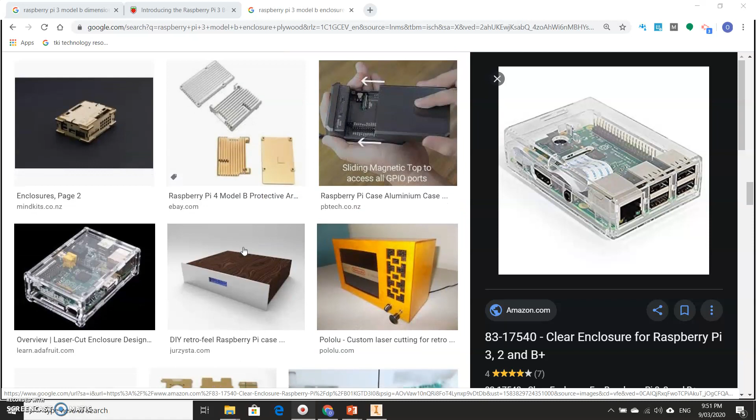Alright, so just a very quick look online to see what other examples there are. There's some clear acrylic used, again on the laser cutter.

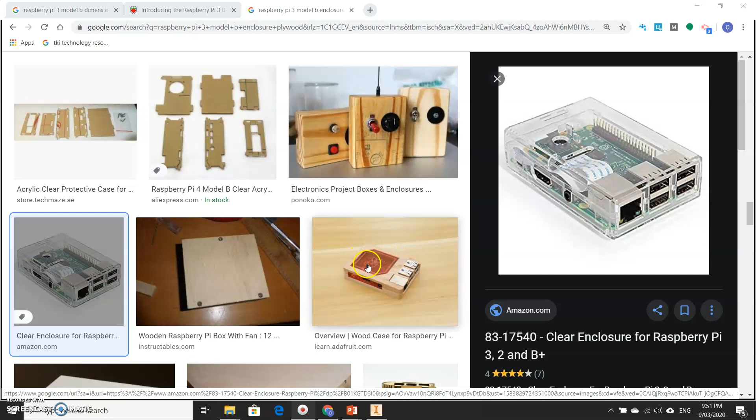But you're not limited to using a laser cutter. I would like you to use some form of CAM, but you can combine some CAM. What's CAM? Computer aided manufacture. So I would like you to incorporate at least a little bit of CAM in there, and that could be - I'm just going to make the enclosure by hand, perfect, but include a little bit of plastic or acrylic just to lift the quality of it. Cool, and it also lifts your skill level too.

Right, let's get into it, alright? Let's get into the actual orthographic projection, the big fancy word, which really doesn't make - it's actually quite easy, alright?

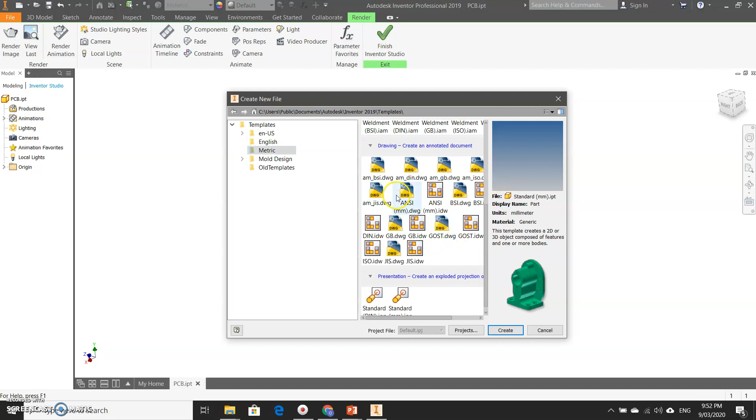So we have saved our drawing, and the first thing we're going to do is go up here and click on New. We'll go to Metric. We'll scroll down - we've done part, we'll do assembly later when we've done our actual enclosure, but we'll go down here to drawing this time. We're looking for a DWG file, and we're looking for millimeters. That's pretty good there, mm.dwg. Click on create.

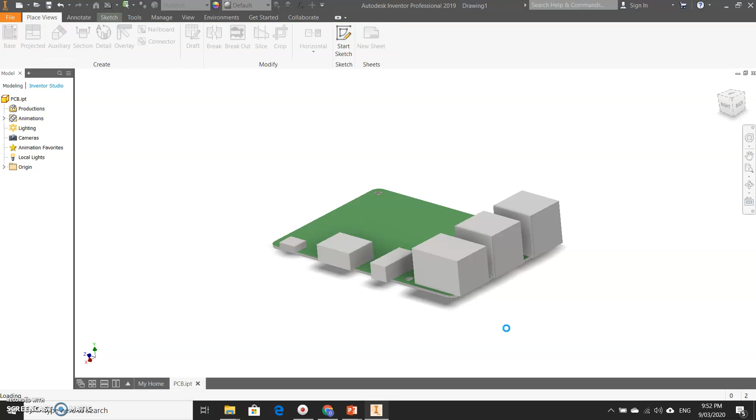Now, again, quite a big software, give it a little second, let it do its magic. Now then, we're into it. So what we can do is we can go and click on base, and it automatically finds the last drawing that you were working on.

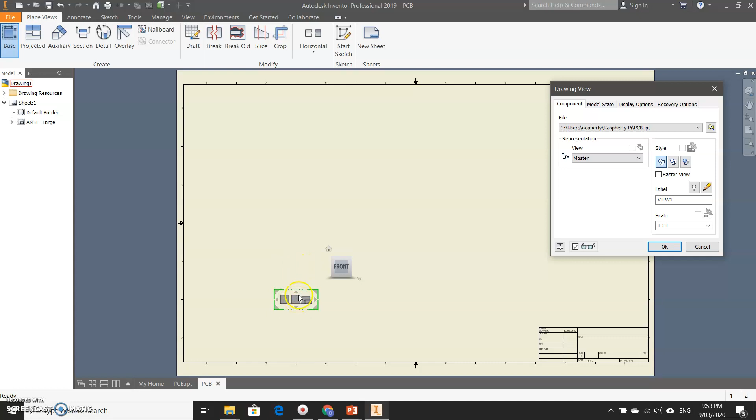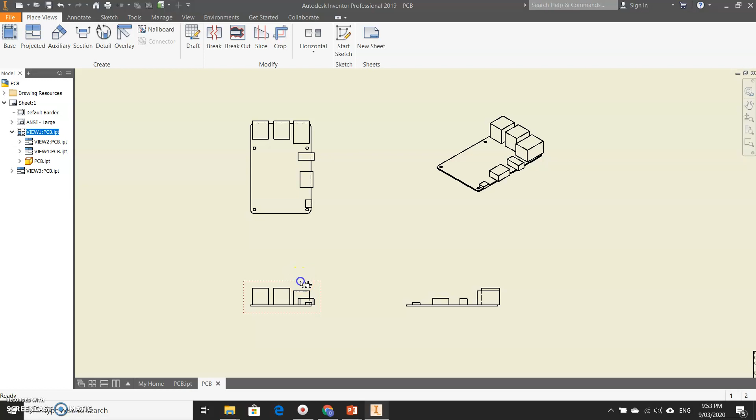How handy is that? Alright, it's automatically throwing up the front elevation down there. It's going to throw us a plan view there. It may even do a 3D over here, and there's another elevation of it there. Now I'm just going to press OK. So what have we got here? That's what the front looks like. This is what the side looks like. That's what it looks like from the top. And that's what it looks like in 3D.

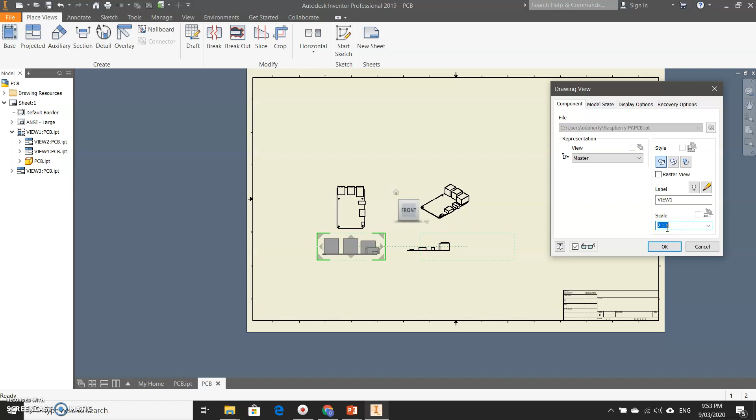Now look at the size of our page and look at the size of our drawing. If I right click here and go to edit view, I can do things like changing the scale to make it either bigger or smaller. So 2:1 means it's going to be twice the size of what it should be. I'm going to press OK and see what that does. I've got drawings, one sitting on top of the other. I can just drag them away. And notice that when I drag it, it only allows me to actually drag it when it's in line with the original.

So I thought I was going to sneeze there.

And this drawing over here, I'm going to make it quite big as well. So edit view, and this time let's make it humongous, 3 times the size of what it should be. In actual fact, that's probably quite a nice size there to actually see what we're doing.

So let's do that for all of our drawings. Sorry, it has to be the original that we change. So we go to edit view, change the scale to be 3 times bigger than what it would be. Click on OK. There we go.

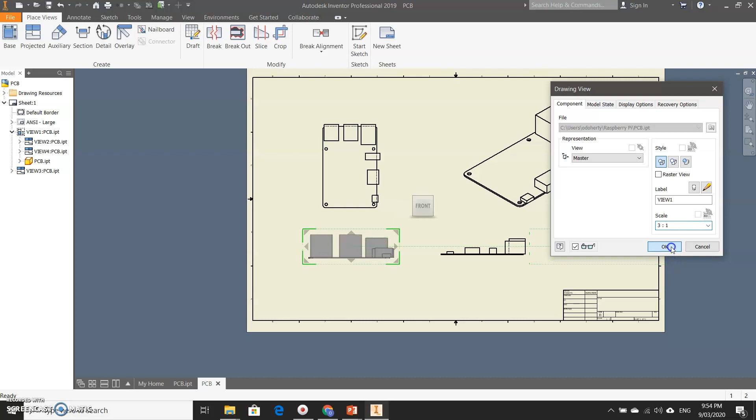Now, right. Now we can get into it. Annotate. Dimension. Alright, I'm going to click on this bottom line here and this top line up here and drag that out to the left and click.

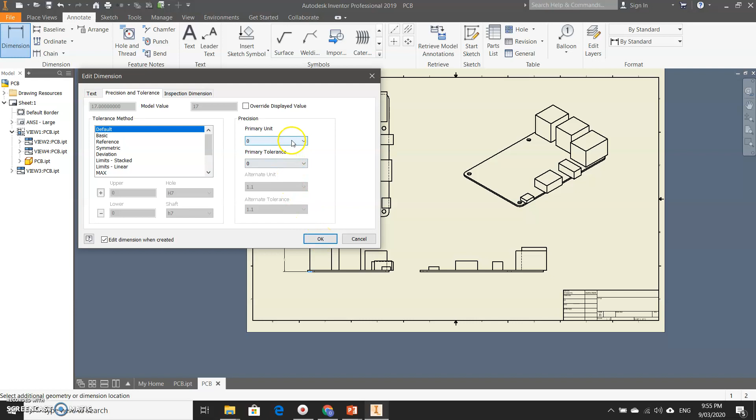Primary unit, I'm just going to put it down to 0, okay? So that should then mean that we don't get really any decimal places, or we can say allow for 1 decimal place. So if we zoom in, that gives us 17.0. Right.

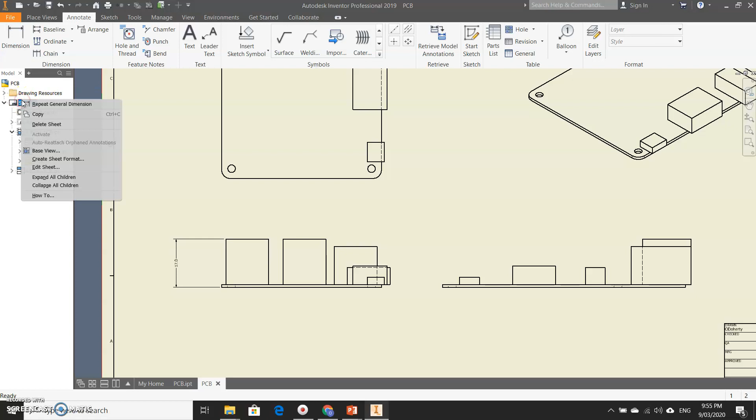So let's get to our next one now. This drawing page looks like it's going to be quite big. So the way we can change that is by going into sheet here. I'm actually in dimension here. So 1 second. Right. Press escape on your keyboard. Click on sheet. Right click on it.

Go to edit sheet, and then we can change the size. So we actually want it to be A3, really, don't we? Click on OK. Now it looks a bit big. So edit view again.

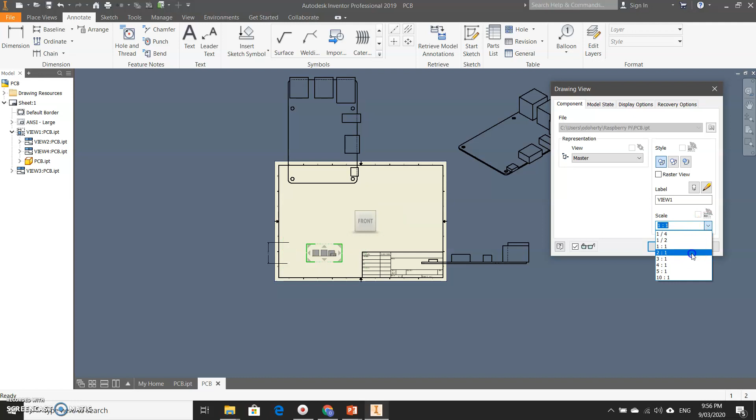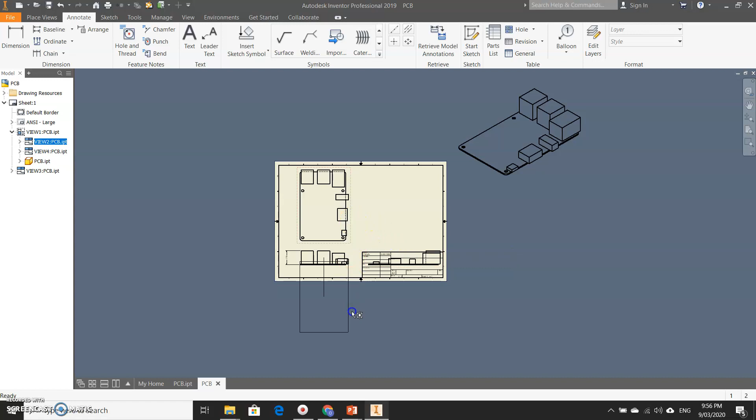Edit view. Let's bring it back down to size 2:1 will be fine. Click on OK. Drag that down onto our page. Now really, does it actually matter, this drawing, on the page where it sits? Not really, because we're only using this as a working document. So I'm going to change the orientation around somewhat,

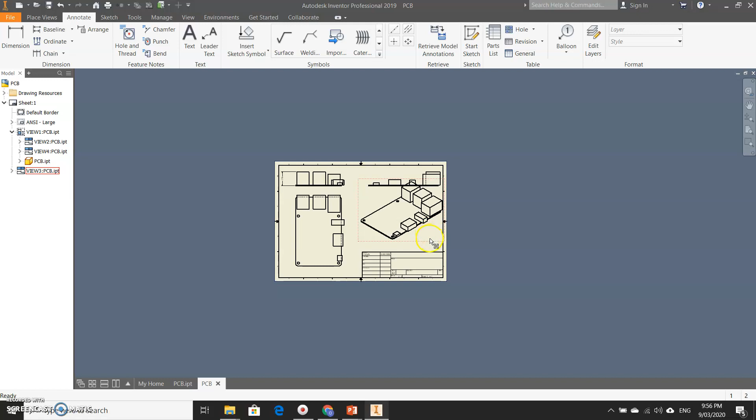and not really in a way that it should be actually presented. So that is 2:1 and press OK. Now, when it comes to presenting these in a more realistic version, we'll come to that later. But in terms of us trying to get our dimensions correct, ready for doing our drawings, we're going to use this page now as it's set up here, okay?

So what I'm going to do then is click on the dimension tool, click on each of the lines that I need to know. Okay, that's going to be 17 again. The dimension between there and there is going to be 5. The dimension of that one is 15 again. The dimension of this one.

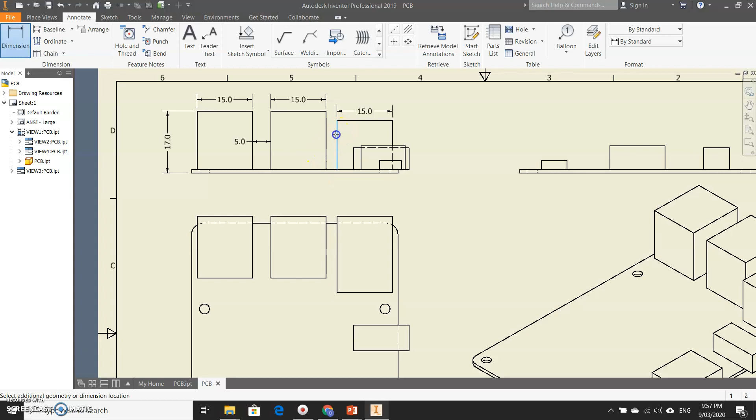So you're just using the dimension tool. Sorry, I'm just after clicking on that green ball again twice in a row. You're just using the dimension tool to give you an idea as to what you need for each of the dimensions, alright? Now, yes, in theory we could have just worked off the dimensions that we used in the first place and try and figure it all out as we go. However, I believe this will be more accurate and more in line with your actual drawing. That'll make things a little bit easier when it comes to putting it all together.

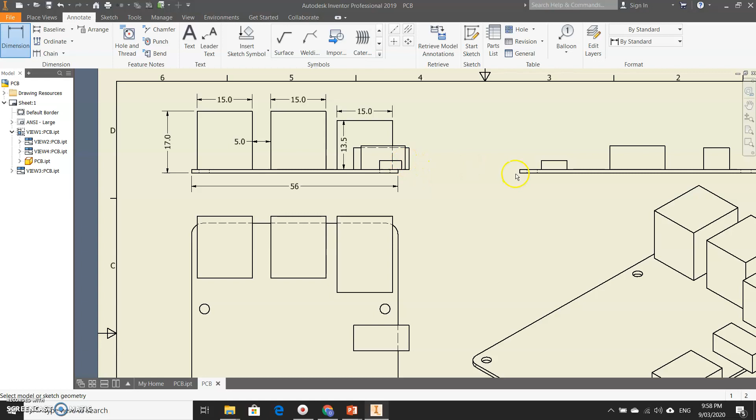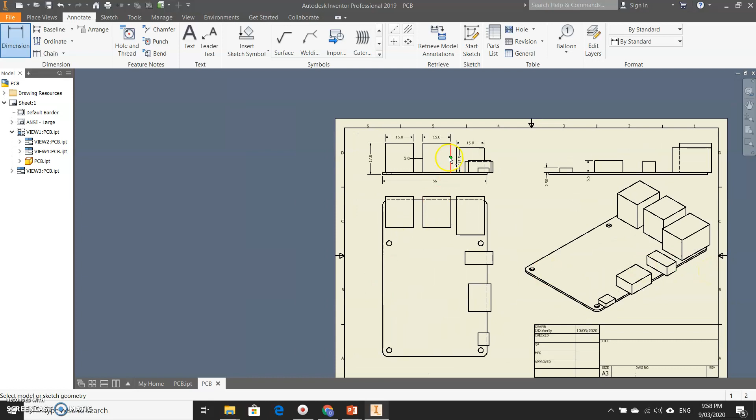Alright, so again, each of the components, we're dimensioning everything that we need to know. We'll dimension now, and we can come back into this drawing as we go as well to help put it all together. Now, right, that's enough dimensions for the time being. Okay, realistically, the main measurements that we need to know at this stage is 56 by 17 to create a rectangle. This is for the back.

Now we need to think about what we're going to do. Are we going to laser cut it? Are we going to use a 3D printer? And what thickness of materials are we going to use? So for example, if we're using the laser cutter, the chances are you're going to be using a 3mm plywood, okay, or MDF or acrylic, but they're all 3mm.

So we would think about the solder that's underneath the PCB, underneath this red line, add on another millimeter to the 17. Maybe add on another 3mm so that you've got some acrylic to run along the base, some 3mm above here to run along the top, and the same thing for the sides. So we'll take that into consideration now as we start our new drawing.

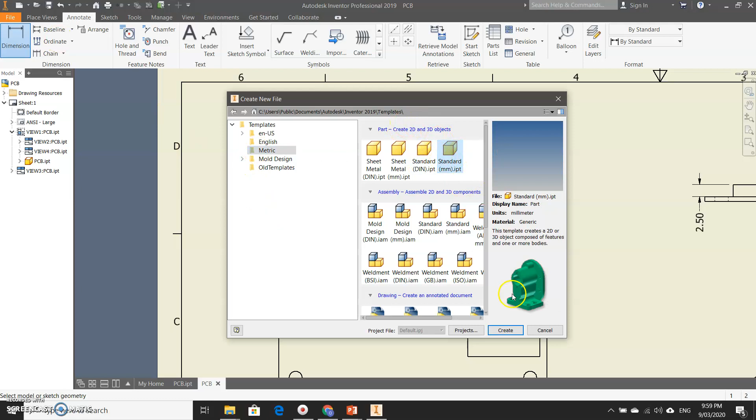When we click on new, click on metric, click on part, so part Standard (mm).ipt, click on create, and you'll notice down at the bottom this is your new part. So if we go to file, save as, and we're going to call this one here USB side of enclosure, and press save.

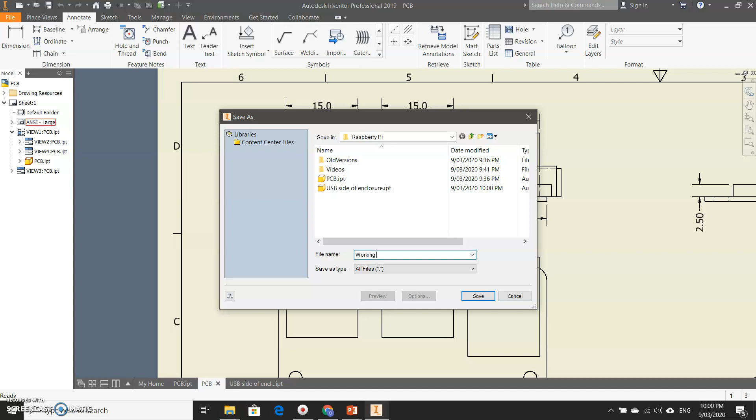Right, and we'll save this drawing here as well. We're going to go file, save as. That's not an orthographic, not a true orthographic, so let's just call it a working drawing, okay? And press save. Now we've got those to work from as we go. So if you're finished this lesson early and you want to get into it again, you've got it there. You don't need to recreate it.

So now what we need to do then is a rectangle. We've just stated that. We're going to draw it from the side this time. We're going to click in there where it says 0, 0. We're going to drag it out, and we knew that it was 17 in height.

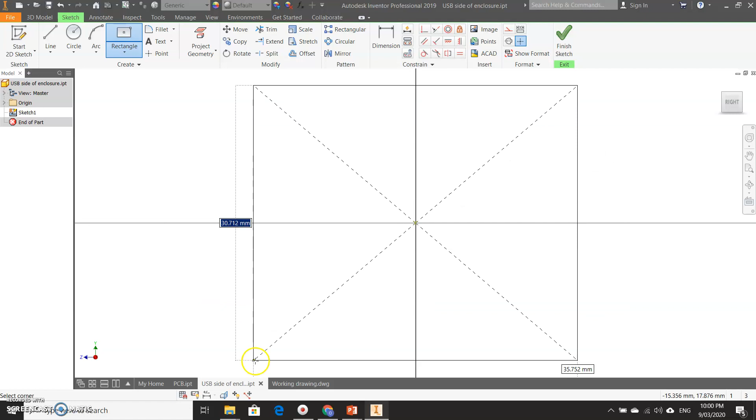Right, so if we click on our working drawing down here, 17 from the base of the PCB to the top, plus some solder on the bottom, plus some material for the base, plus some material for the top. Alright, so that's all of our considerations. We're thinking now as we're going. So 17 in height, plus solder in the bottom, we said about 1mm, plus 3mm for the base, plus another 3mm for the top. And it depends on your design if you've got anything overhanging or not.

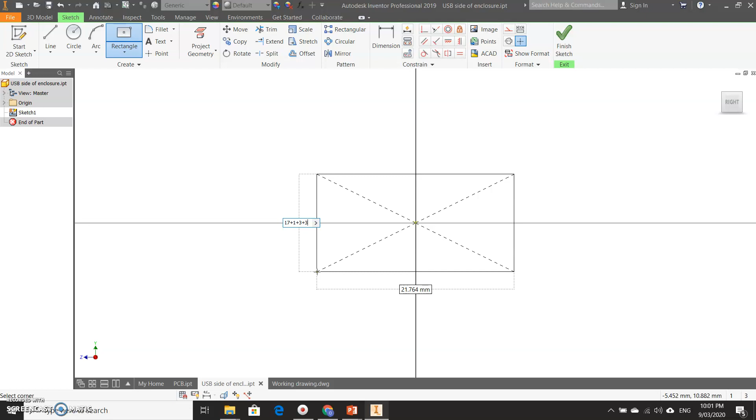And I'm going to press enter. Right, so it's given us 24. Oh no, I didn't do the sides.

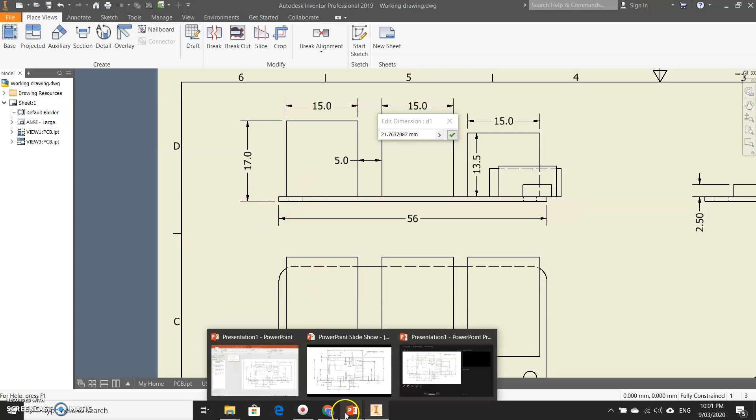Right, use your dimension tool, click on the side, right, and click up here. Gives us an opportunity now to go and figure out what the width is. So 56 plus the 3mm on this side and plus 3mm on that side. Okay, now anyone that's good at maths, you'll be able to tot that up into your head to 62.

You can just type it in here. So if I go 56 plus 3 plus 3, press enter, and zoom out, you should get 62 as well, alright? Now, so you can allow the computer to do the maths for you, if you like.

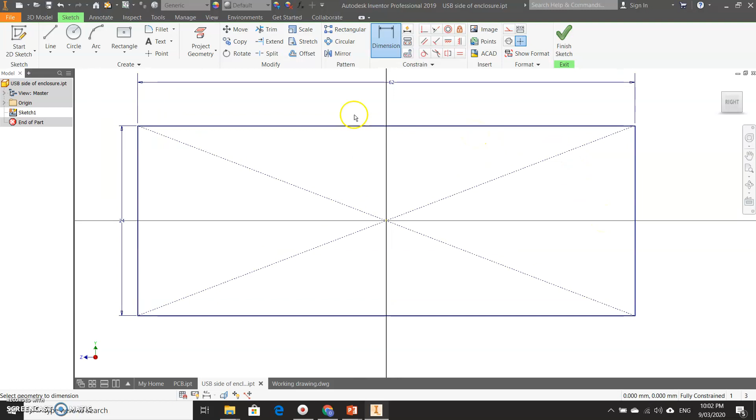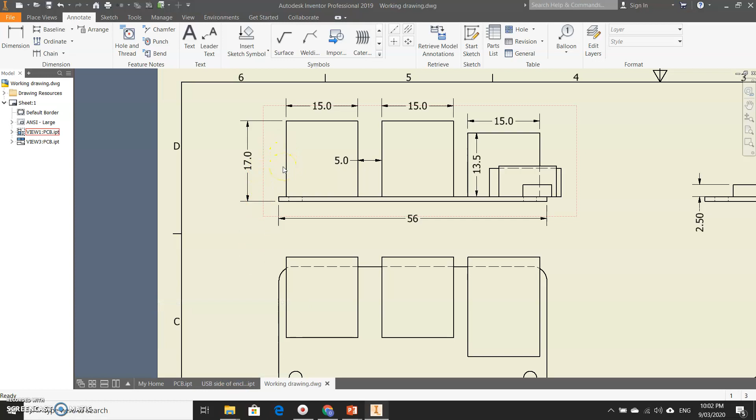Right. Where are we now? Where are these little boxes going to be? So, again, back into your working drawing. So we need to find out what distance, first of all, what distance is it from the edge here to this edge here? And that is 1.5 on my drawing. It's probably not 1.5 in real life, so do double check your dimensions. So 1.5 plus the 3 over there will be 4.5.

So if I go and draw this time now, I'm using a different rectangle now. I'm using a two-point because, what do I know? I don't know. I don't need to use that. We'll use it anyway. Let's see what the difference is. I can draw a corner rectangle there like that.

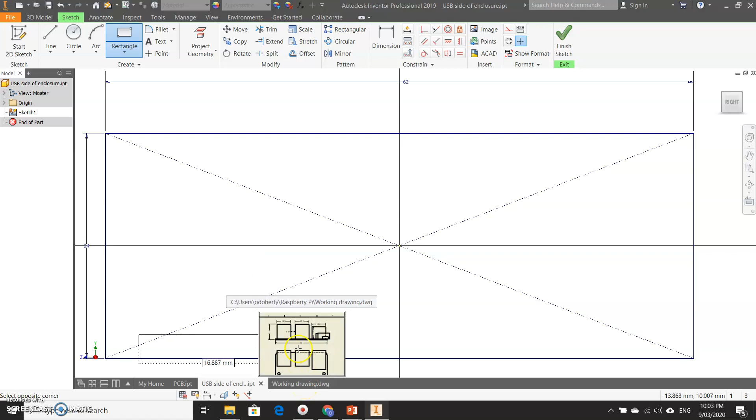I know that the height of it, if I go back into it, so you can click back in there, the height is going to be 16 by 15. Back into my other drawing again, so if we go 16 by 15, press enter.

I know that the spacing is going to be 1mm for the solder, 3mm for material, that's 4. 3 plus 1 is 4. So 4 up from the base. From the edge to there, we said it was 1.5 plus the 3mm of material. Press enter. Okay, so that's the first hole.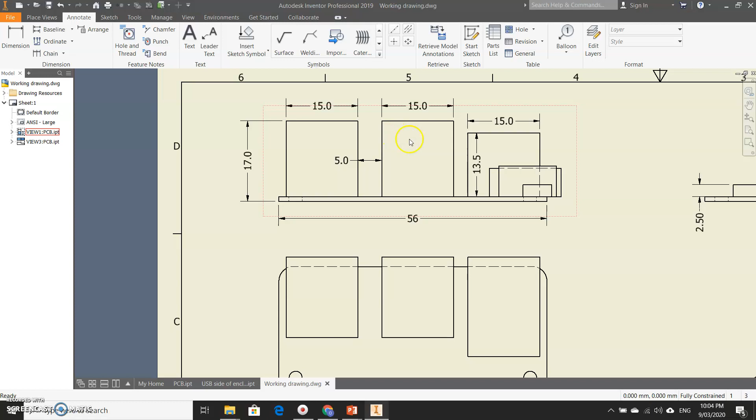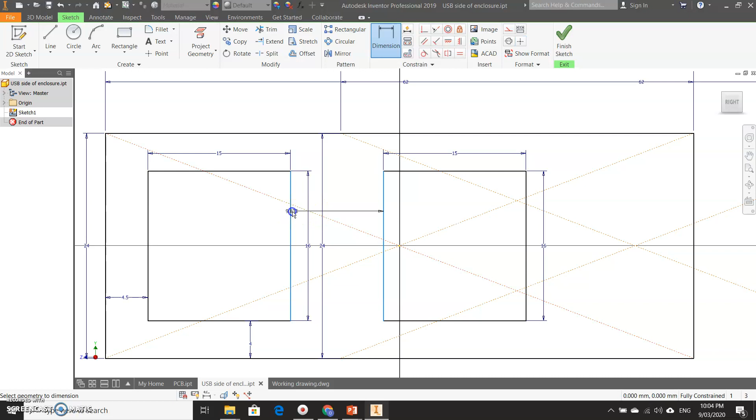Next one is going to be the exact same thing, but just 5mm over from the original. So go to copy, click on all of the parts that I want to copy. I'm going to go to base point. I'm going to select this base point and drag it across to there. Right, press escape, click on the dimension tool, click on this line, click on this line. The dimension should be 5.